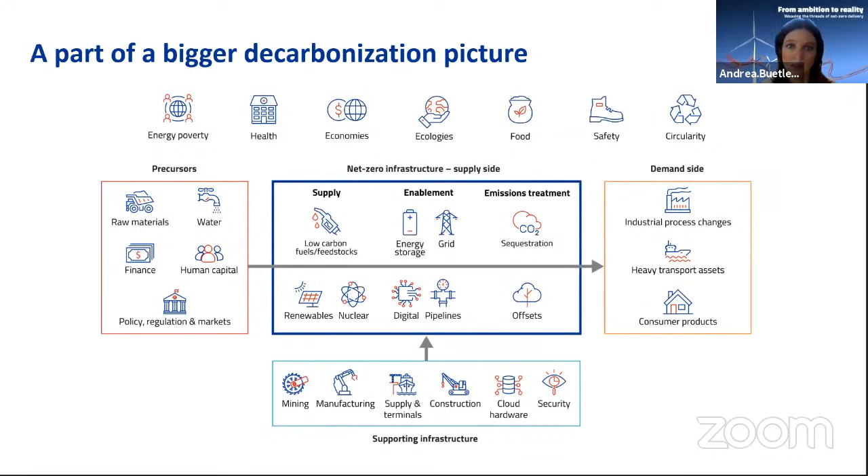Now, the research done is actually quite long, and I'll be happy to share the link to the actual paper in the chat box later on. But going a bit fast forward, what are the key findings? What do we need to do differently?

So there needs to be a different understanding of value. We need to look at this away from a pure economic and commercial perspective, but towards a socio-economic and environmental perspective. This is a single opportunity we have for humanity to include future generations and ensure future resources of our planet are made available, and risks of extreme weather are mitigated.

Now also the role of digital is absolutely huge and a key enabler. Key partnerships we need to rethink, and we as Worley actually see how stakeholders around major projects engage with each other differently. And that is brilliant to see, yet it just needs to increase in pace and scale and needs to be replicated.

Now, what is very important in this is an acknowledgement that there is not one solution for all. And I think that holds very much true for India as well. There is this paradigm, like, well, let's just do this or let's just do that. The reality is that there are so many unknowns, so much uncertainty across that one cannot just take a single right decision. One needs, at this point in time, to consider and look at all different technologies, all different ways to start moving in that direction.

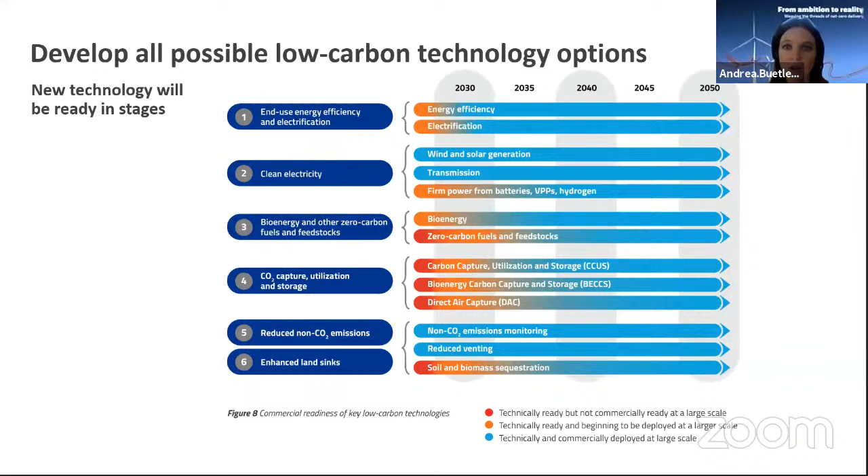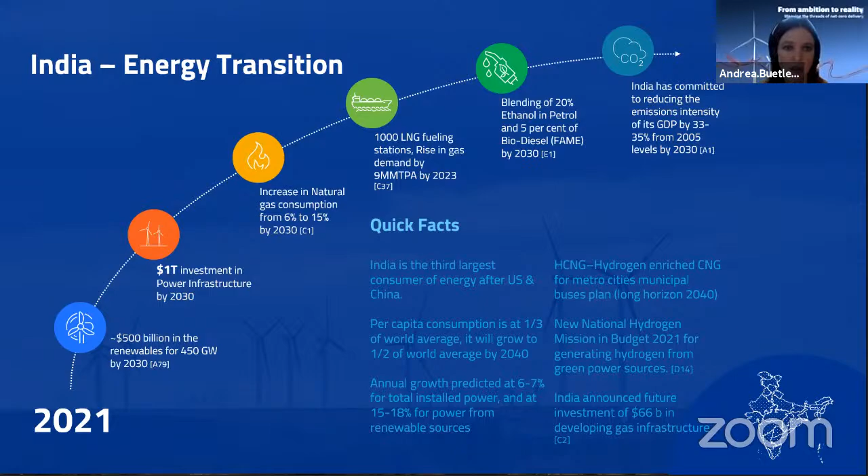As Worley, we engage at the forefront of energy transition in India, and this is based on our own research. We've mapped out the trajectory, and when my team shared this with me, I was simply impressed by the opportunity India presents, but also the steps taken, the commitments in terms of funding and change of standards, which trigger a demand for cleaner fuels, is happening. This is real, based on our research, but we also acknowledge that things change really fast. We can look back at the global level to have completed or be in completion of more than 3,000 projects, and therefore are in a position to take a cross-technology view on what may be suitable or not, and when to make net zero real.

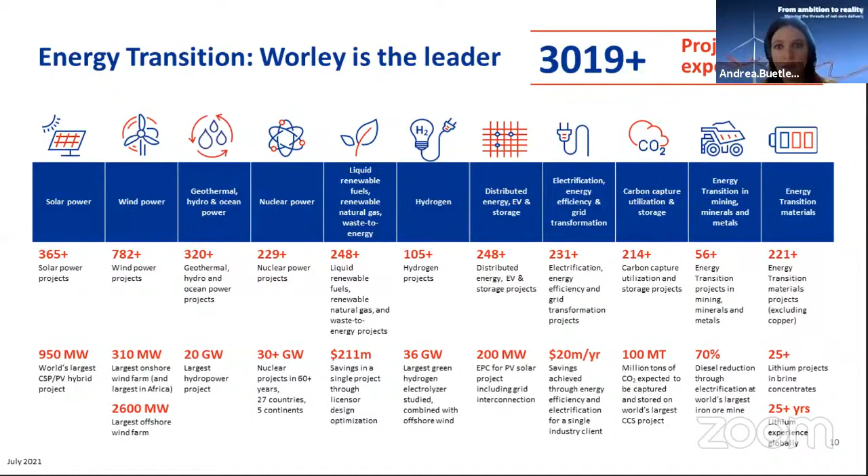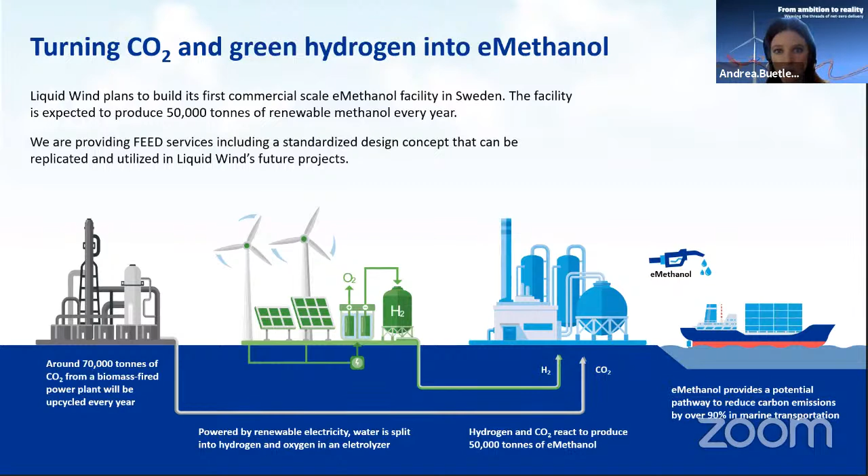To make it a bit real for you, I want to showcase two projects we are involved in. The first is a company called Liquid Wind, and they have announced plans to build their first facility in Sweden. They use CO2 from a biomass-fired power plant, and green hydrogen, to produce e-methanol with an aggressive scale-up timeline. At the moment, they're looking at the pilot, then at 10 facilities, and the second stage is 500 facilities globally. This is very promising, and the reason I'm showing this example is we believe there is relevance for India in this.

The second project I'd like to highlight, which goes well with the theme on refining today, is Shell's Holland Hydrogen project. It's located in Rotterdam, and operations are scheduled to start in 2023, producing 50 to 60,000 kilograms of hydrogen per day, with an overall capacity of 200 megawatts. I'm showing this because the aim of Shell is to use this in its refinery in Pernis, particularly to decarbonize the production of fossil fuels, and to support the industrial use of hydrogen in the heavy transportation industry.

I want to close my presentation by reinforcing that by coming together now, we can intelligently bring innovative solutions together and foster new ones. So I urge each one of you to be that advocate of a sustainable future, within your sphere of influence. It's together that we can make a lasting impact happen. Thank you.

Thank you, Andrea. It was very brief, and it set the tone of the session. In summary, you talked about the requirement of further policy expediency to meet the target of net zero. So in a nutshell, if I can borrow from Robert Frost, we still have miles to go before probably we can sleep over the issue.

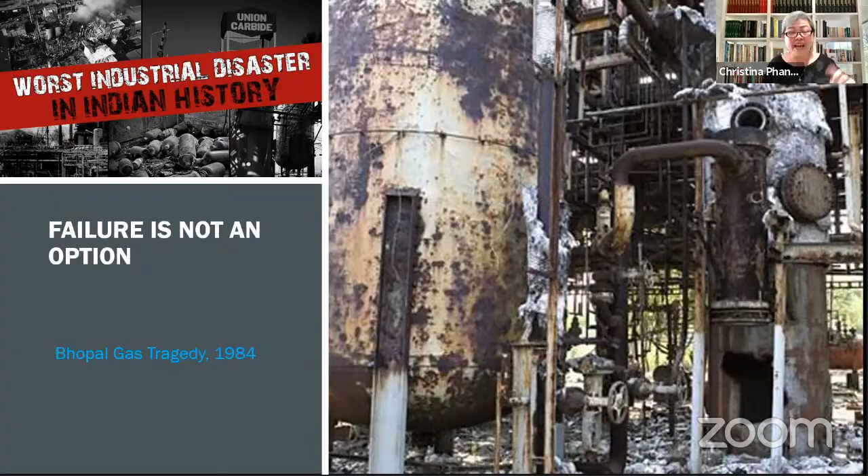What is really concerning, or the question I want to pose to us today, is that by not seeing another incident of that magnitude, have we been really good, or have we just been lucky? Because two decades later, we saw another major incident that happened many, many kilometers away in Texas City.

Despite the effects of Texas City - major loss of asset, major financial loss, loss of face even for people at the board level - although there was not as much loss of life, the question that befits us today is: are we moving forward? Are we operating, are we designing our plants with this sense of chronic unease, that effort and commitment needs to be put in to actually prevent another Bhopal and another Texas City?

So I think we all agree that as people working in the refining and petrochem industry, we consider ourselves as working in high reliability organizations, because that is what is demanded of us. In order to make sure we achieve the profitability targets, the production targets that we have, we need to be that high reliability organization.

A lot of research has been put into defining what an HRO is. I suppose we can count ourselves privileged as working in organizations where we have to operate in situations with potentially large scale risk and harm. But as organizations, we can still manage to balance effectiveness, efficiency, and safety.

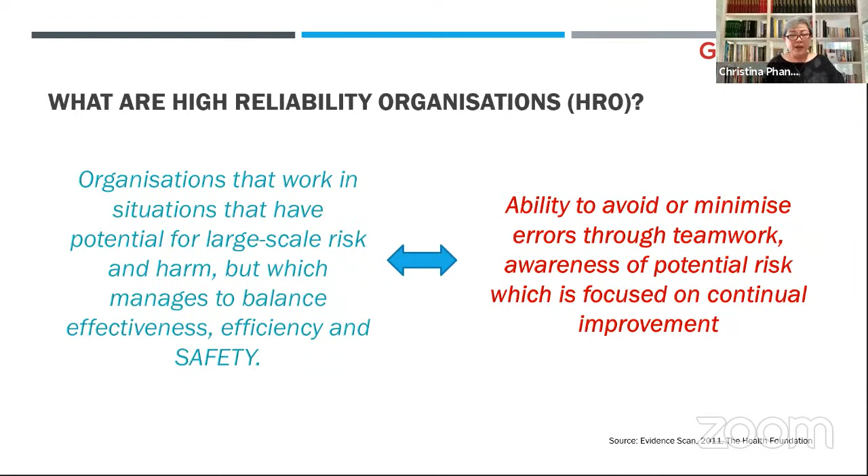So what is a key feature of a high reliability organization? I hope we all agree that it is one that will focus on preventing and/or limiting the impacts of major accidents and process failures. I believe that, as expected, high reliability organizations such as the ones we work in, the industry we are in, we do say that we prioritize process safety. But actually, when the tire hits the road, I just want to ask ourselves this question.

Amidst all the pressures from our stakeholders, the time pressures of getting a project online in the shortest time possible, really the concept of prioritizing process safety over all the other pressures, the competing business demands that face us every day - does this whole concept of achieving top-class process safety become meaningless? It's like what the wise King Solomon says, a chasing after the wind. Safety professionals often get frustrated and demoralized because we are either the most misunderstood people, or we are seen as nuisance makers and budget suckers because we are just asking and don't seem to be contributing to the profitability, the bottom line, of our business.

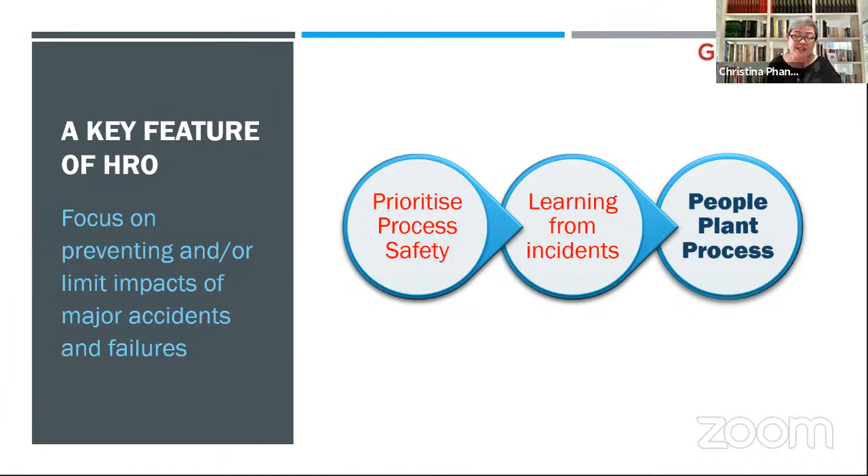What really started as research I began 30 years ago, when I looked into the root causes of major incidents - that was when I worked with the UK Health and Safety Executive, and they were scratching their heads saying, if two plants are designed the same, why is one having more incidents than the other? Why is one underperforming in terms of process safety performance? It's becoming clearer to us now that while it's really fun to play in the technical aspects of process safety, what we really need is the combination of the socio-technical ecosystem. Discussing with my colleagues this morning, we were debating what weightage should be given to the technical side versus the social side of implementing technical systems that are probably not new, because process safety is a subject that has spanned a few decades.

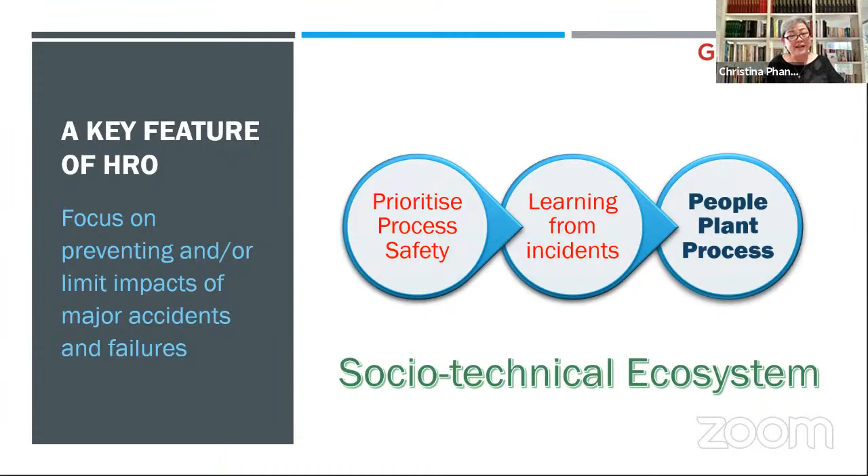So the question I would like to ask ourselves is, in terms of what we want to achieve in our process safety performance, what is it that will support our company - if we are good at achieving our process safety goals, how will that contribute to growing the business demands before us?

I think we are all very familiar with this 'as low as reasonably practicable' principle. We think that if we fall into this middle ground, then we are fine because we have done all we can, and we put up our hands and say, right, we think we are safe because our risks are tolerable. But as a high reliability organization, I would like to put it to you that we should actually view process safety risk as more than just being as low as reasonably practicable.

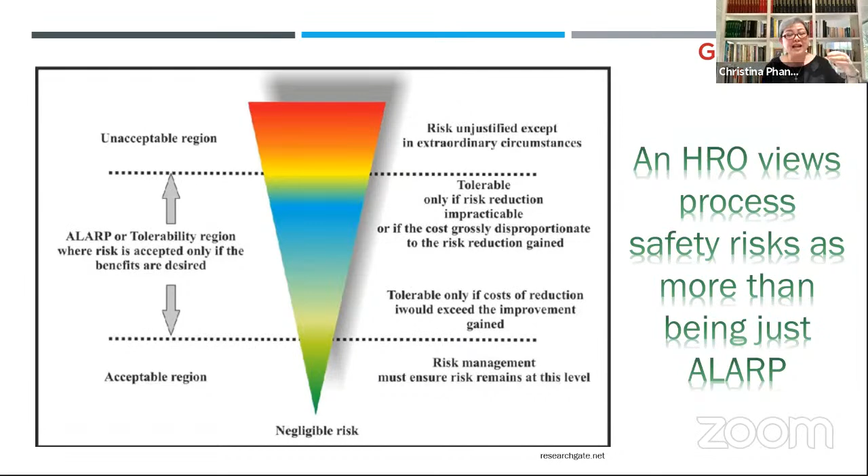Just as there is this race to go to net zero, I think the leadership challenge in terms of process safety is really, how do we get to zero incidents? Some people say that's just wishful thinking, because if you look at decades of systems, procedures, and initiatives we have put in, what we actually have is a compliance and discipline culture - developed through the rigorous checking of lagging indicators such as incident rates and fatality rates. That has just caused people to follow that straight line drawn before them.

What really happens when there is a change of guard, when our older workforce retires and new people come in, and when new technology comes in, we start to see a plateau in our process safety performance. Worse still, we see a creeping up of unwanted incidents, and we all know the Heinrich theory about many small incidents leading to a major big bang.

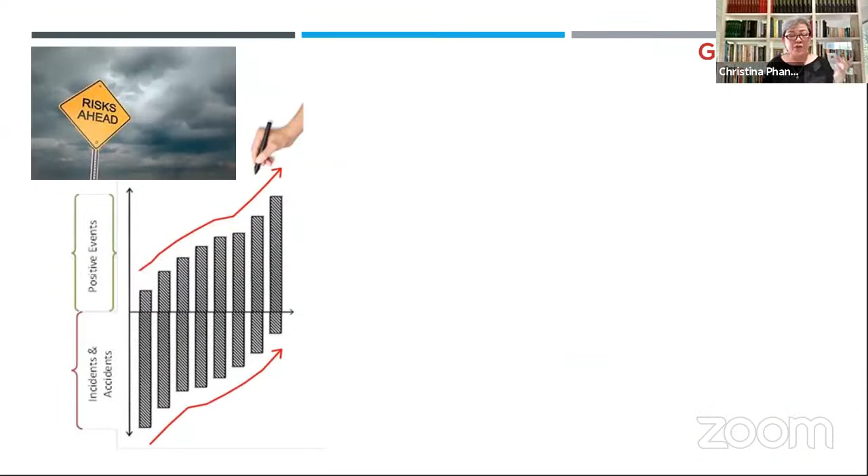So what I want to propose today is, rather than focusing only on negative events, to be able to achieve improved performance and cultivate a resilient process safety culture, we need to focus on creating positive events, so that the positive events will help us reduce the negative ones.

What do I mean by that? We move from just collating personal safety issues to looking at positive events: do we recognize safer actions, leadership recognition, breakthroughs in the well-being of our people? And if we move across the spectrum to process safety, what are the breakthrough performance improvements we can achieve in process integrity, which support our goal of improving our bottom line?

One very key thing is leadership vulnerability and acts of learning from the successes and failures of good programs. How do we design early warning triggers that give leaders at the board level the understanding that process safety is not something to be passed on to some technical genius, but something they themselves can lead, by creating positive process safety events that help sustain and build resilience in their process safety journey.

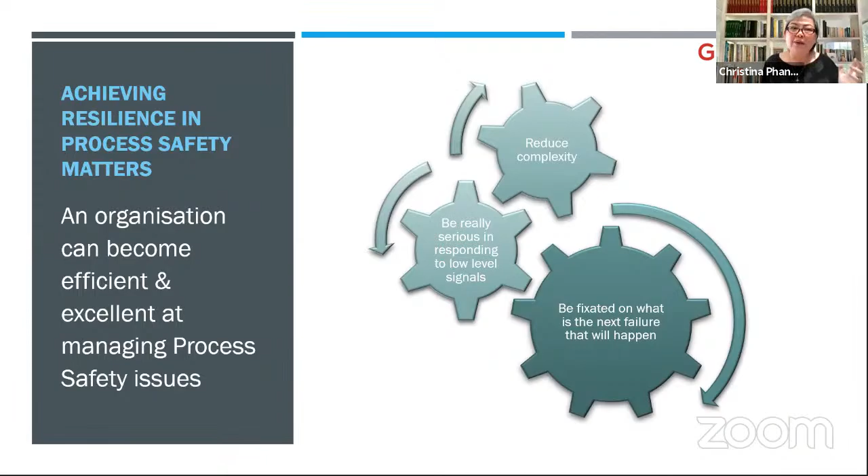Not just loss of life - we all know the organization that ran Bhopal no longer exists today - it is the reputation that one should be guarding with our lives, so that we will not have to be answerable to our stakeholders and to the public at large.

I just want to end today by quoting Albert Einstein. He says, we cannot solve our problems with the same thinking we used when we created them.

So I want to challenge ourselves, even as we go away from this amazing three-day conference: what is it about our thinking that we need to change with respect to incorporating and integrating process safety into all the new technologies we are successfully implementing? How can we work collaboratively with our colleagues and even our competitors to change this mindset, so we can achieve the results we want and run sustainable plants, sustainable businesses?

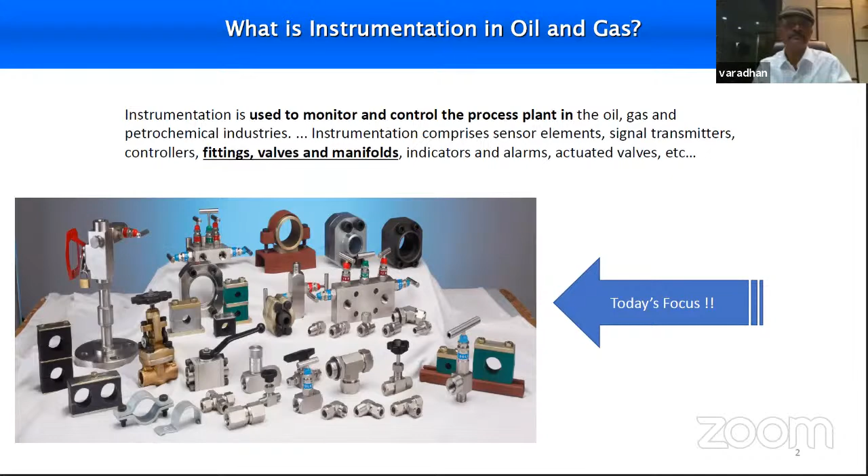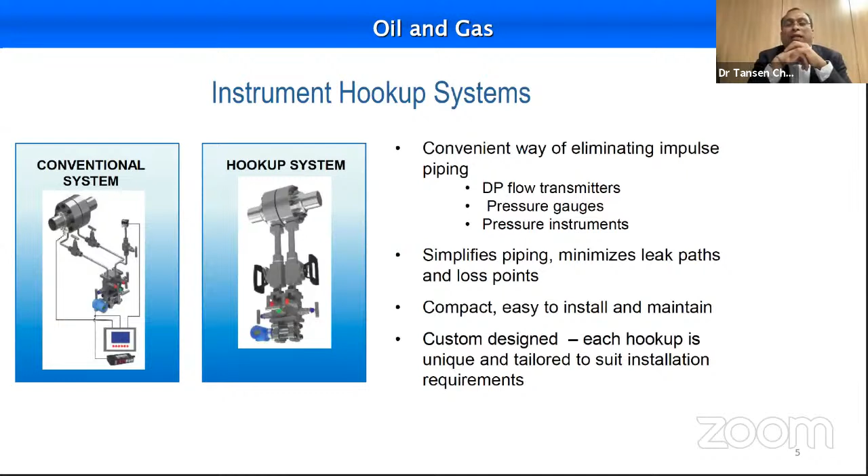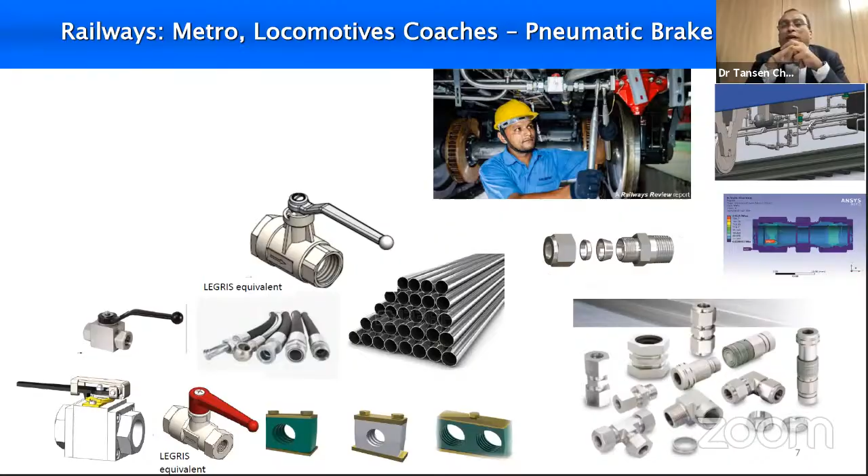The expectations here are more on the vibration side, more on impulses, and they are subject to a lot of operational changes, environments, and corrosion and so on. So the same products which the oil and gas segment has are getting leveraged into other segments as well, in terms of usability and product flexibility.

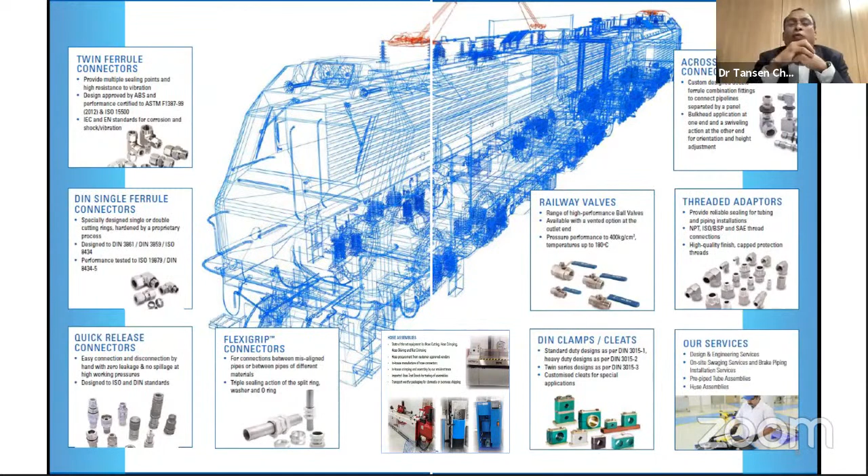I'll move to the next slide, talking about the same products, the machines and their usability. On the left side, what you see is the typical crimping machine and swaging machine used in oil and gas for fitting purposes, still used in the railway segment as well. Using the same innovation concepts, we've also given a unique solution to the railway industry for connecting the bottom side of the railway to the top side in terms of the flow—instrumentation being measurement of what flows inside as a flow or fluid.

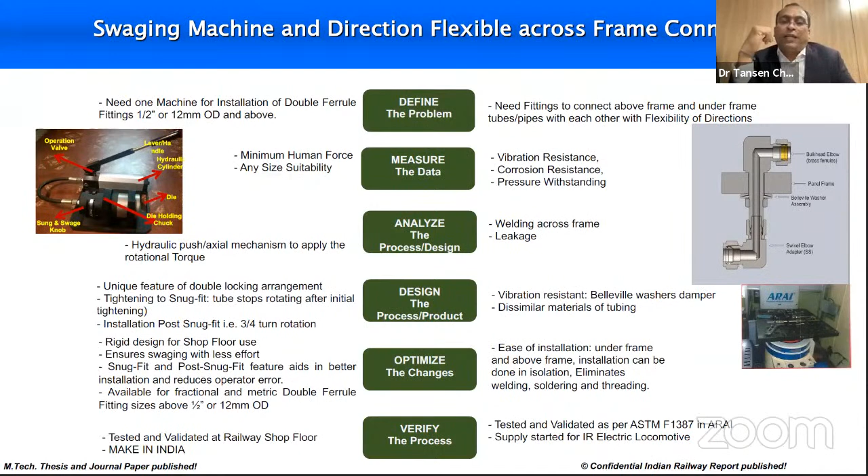I'll move to the next slide, where I'll talk about similar products leveraged and used in the power industry. When I refer to power, on slide 11 I'm talking about nothing but the nuclear industry—nuclear power generation, where the manifold concepts we have in oil and gas are still used at a different level, such as a bellow seal manifold, more in terms of high pressure, temperature, and reliability, because these products sit into the reactor.

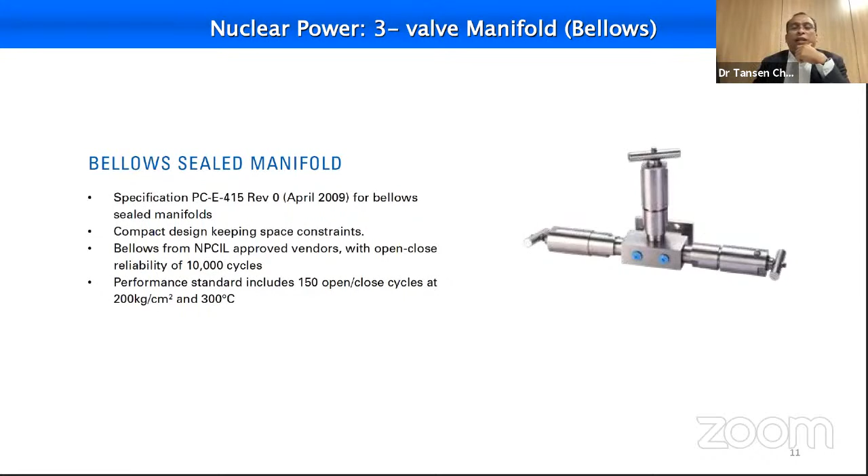On slide 12, I'm talking about the 5-valve manifolds used in the instrumentation industry, leveraged in nuclear power for high pressure—110 kg/cm2—and temperature up to 300 degrees Celsius, where the expectation of sealing, as Mr. Vardhan also referred to, is critically required to perform, because using this particular thing more often, in terms of reliability, you don't want anything to really stop over.

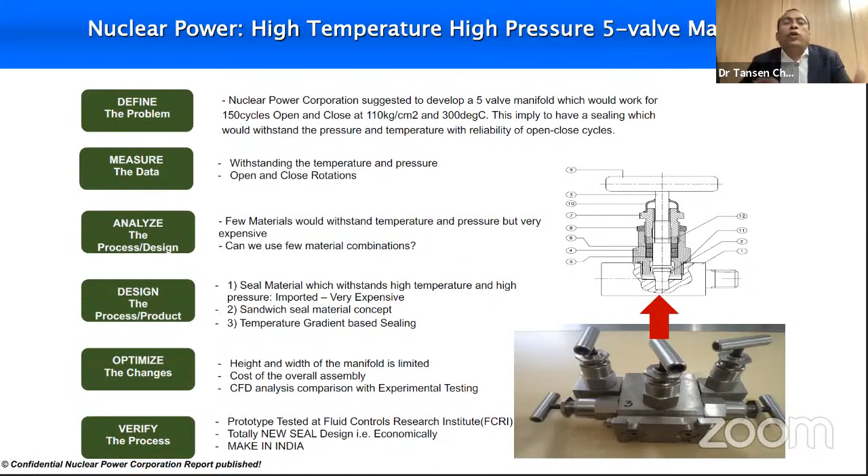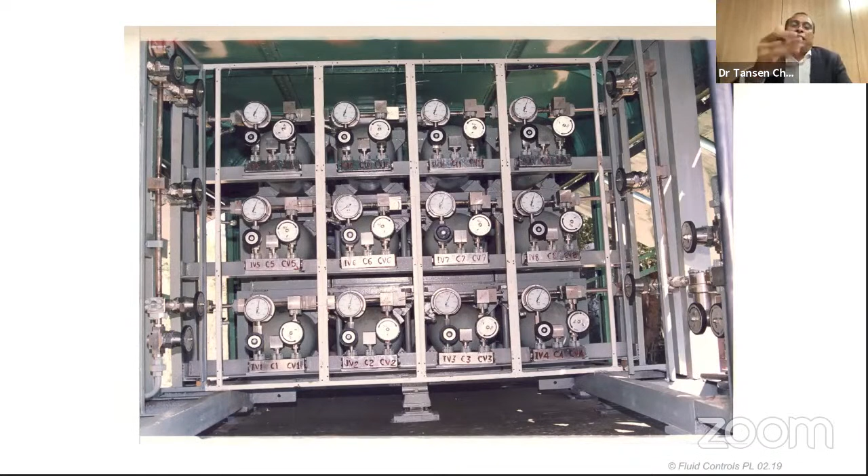It's 3 o'clock now, so now I'm moving to the defense industry, similar products. In slide 14, you will see surface launch vehicles of the missile. The next slide shows the same instrumentation products which oil and gas, power, or railways use are also getting used in defense launch vehicles. The circuit looks quite complicated, but the next slide will talk in more detail about the instrumentation products.

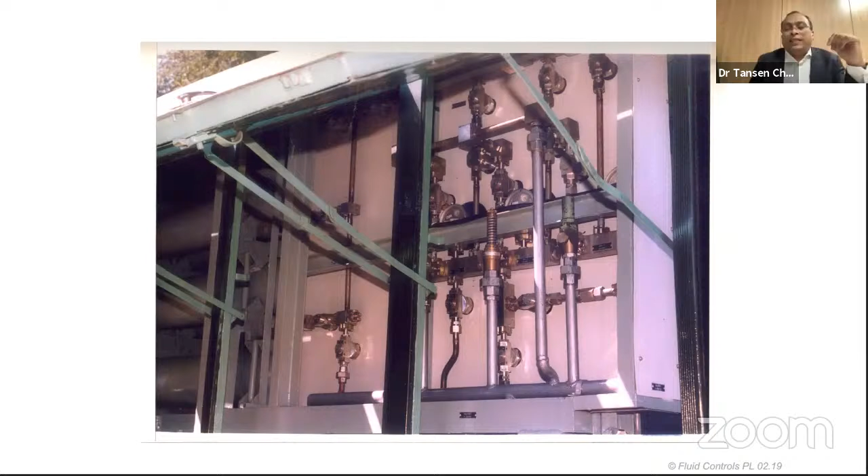The flexibility of the product is about knowing what each product in this segment is expected to perform. Oil and gas expects it from different angles, but no industry is going to let go of the reliability, product functionality, and fitment expected out of it. So my next slide talks about the flexibility of products coming from oil and gas instrumentation, and where in all these segments it could be leveraged.

In the defense segment too, we've seen how during launch of satellites and missiles, back pressure and forward pressure need to be withstood by these products, which are system critical from a flexibility perspective. So the concept I wanted to launch is that products from one segment with the same severity and leverage can be used in another segment with the same reliability. This flexibility exists because many global standards like ASME, ASTM, etc. drive the functionality of products across segments.

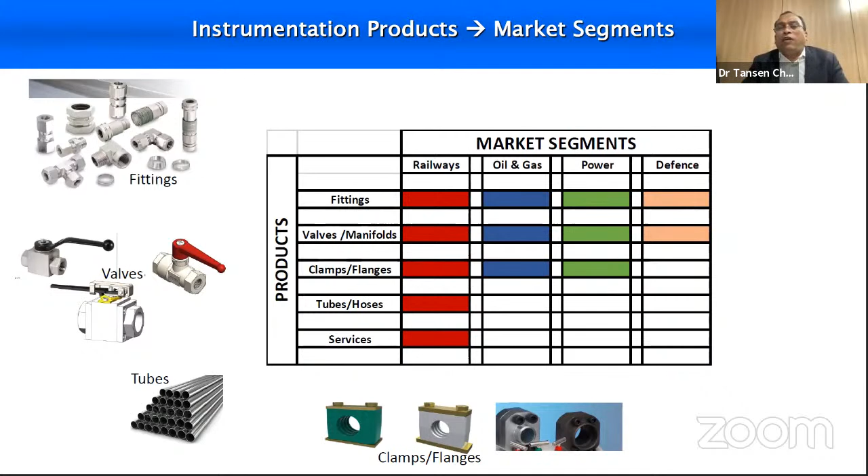So my last slide is about where all these products are currently going. I represent a company called Fluid Controls, which has been in this segment since 1974. We work with many research institutes to have the same product functionality offered in the next product in terms of fit, function, and form - basically reliability. So the next slide is all about localization and having one product leverage flexibility to the rest of these segments as well.

I really appreciate this opportunity given by Chemtech for this good topic on flexibility, leveraging and learning from each other as segments, and of course giving system reliability across all segments in defense, power, and oil and gas. Yes, it has to be. So thank you very much Nandakumar sir and Chemtech for this good topic, where I wanted to really talk about how leveraging learning from each other can be as flexible as the products are flexible. Thank you so much.

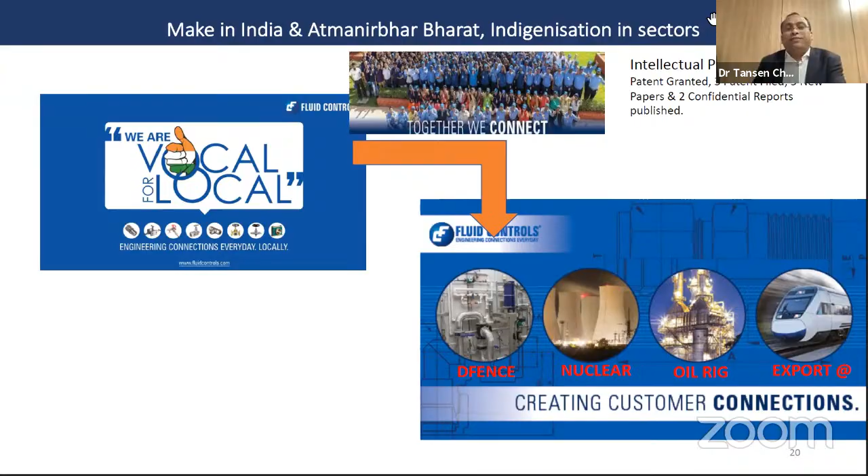Thank you, Dr. Chaudhary, interesting. From our production perspective, we've seen that sometimes even manifold leakage has caused downtime, which is the last thing people expect in their production cycle. So very interesting - this flexibility across various sectors is a concept, probably a cost saving measure, and there is relevance in the overall business perspective.